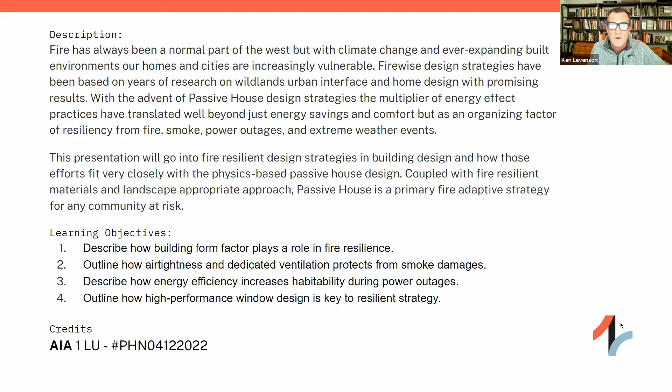Wildfire resilience and the growth of wildfires are of ever increasing importance. We've seen devastation in the West, including the Marshall Fire in Colorado over the holiday season this year, just absolutely devastating. So how can Passive House help support greater resilience in the face of wildfire? We're really glad to have one of our own, Andrew Michler, as quite an authority with growing experience, for better and worse, around wildfires.

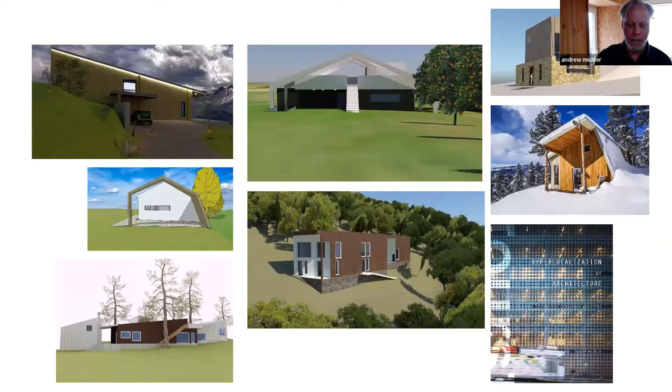Almost all the projects I work on are in WUI areas, that's the wildland urban interface. What that means is basically places that are in forest or at the edge of forest, either communities or a single family home within a heavily wild area. But as we discovered in this last fire, it could also be entire communities just in grasslands that could be threatened too. So all my projects have to think about fire quite specifically.

Actually, I do have one in New York. I don't know if you guys have wildfires in upstate New York, so maybe I can use a little more wood than I typically can, but most of the time I can't.

A lot of the conversation around why we're talking about passive house here for rebuilding after the Marshall fire is because Xcel Energy is providing a $37,500 rebate if you build to a certified passive house, which is pretty unprecedented. And that has a lot of people talking.

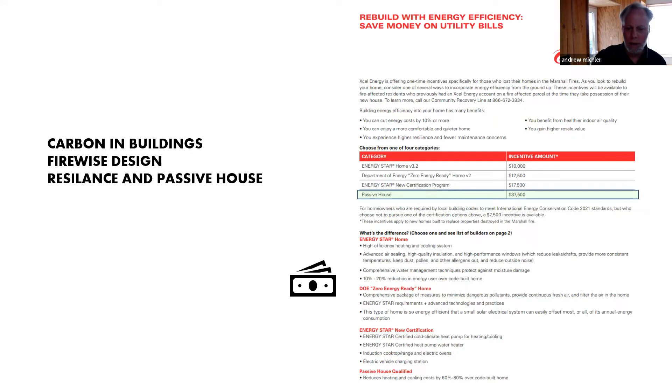It's really got the attention of local government communities, as well as lots of individuals. So we've been working a lot with the Colorado Green Building Guild on providing resources and doing talks on what passive house is, because a lot of people are going to ask their local builder or architect who has no experience, 'can you do passive house?' And they'll probably say yeah, sure. Then we have to figure out how to get that from acknowledgement into actual practice. So we're doing a lot of work on the back end to make this as smooth a process as possible, so this community will become a carbon-ready community in the future.

In terms of fire, I'll read this article that just came out a couple months ago. Researchers discovered that a 2008 newer home is about 16 percentage points, or 40%, less likely to be destroyed than a 1990 home experiencing identical wildfire exposure. Strong evidence concludes that these effects are due to state and local building code changes—first after the deadly 1991 Oakland firestorm, then the strengthening of wildfire codes in 2008.

They observed that vintage effects are highly nonlinear, appearing immediately for homes built after building code changes. There's no similar effect in areas of California not subject to these code changes, or in other states that lack wildfire codes.

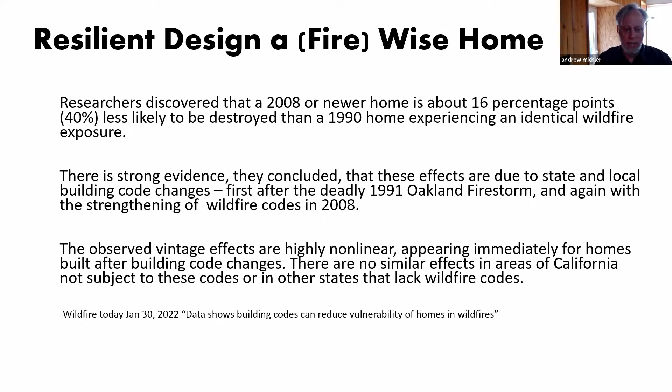So this is one of those things where we see a direct and very powerful correlation between what we build and vulnerability to fires. That level of insight is really quite powerful, not just for individual buildings but for community design and code. Right now code is relatively weak—your standard code might require 5/8 drywall between the garage, you have to insulate the buildings anyhow, and typically put in smoke alarms, and maybe fire blocking within the wall system.

Probably the most aggressive thing we see now for most code-built houses for wildfires is using a Class A type of roofing material. That's typically one of the more vulnerable parts of the house, but fire gets into a building in a multitude of different fashions. So when looking at wildfire conditions, just a fire-resilient roof is certainly not going to be enough.

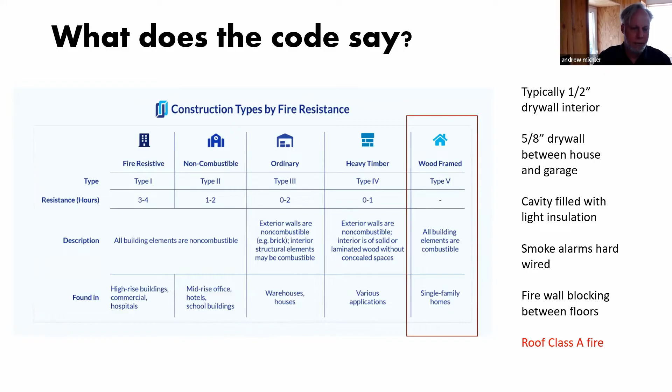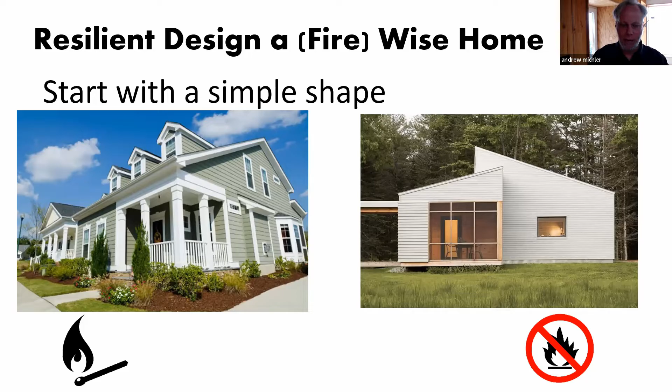So how does that work within the context of passive house and the physics of buildings in general? Well, it starts with the simple shape of the building. We know famously, in passive house, we talk a lot about form factor—turns out that form factor, or a simplified wall-to-floor ratio, meaning we reduce all these bumps and edges to the building, reduces the fire impact of the building when fire conditions come by.

Here's a good graph of what happens. Often in a wildfire event, the first thing that happens is embers coming into the building space, and your building is most vulnerable to these embers when they lodge into corners, underneath cantilevers, or onto corners with decks or eaves. The more complex the building is, the more places for small fire conditions to evolve into larger fire conditions that can get into the structure of the home quite quickly.

Even underneath solar panels, for instance—sure, we have a Class A fire roof, but if we have debris underneath a solar electric array and embers get into that, it can burn right through the roof system, into the roof substrate and into the building itself. So form factor is kind of that first defense against wildfire vulnerability, and also, of course, saves quite a bit of energy.

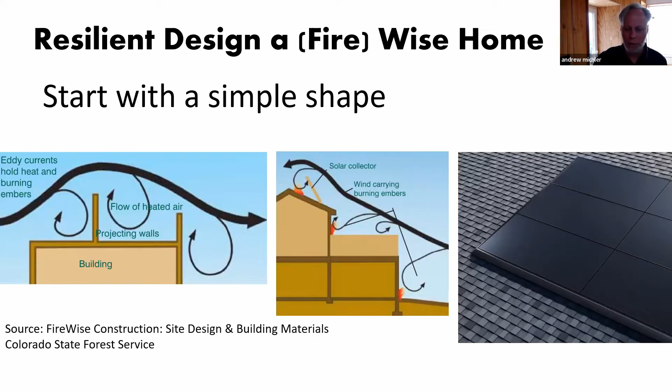I have a slide a little bit on how form factor works in passive house later on. The second serious condition to look at for wildfire resilience is around the house—what they call defensible space in the WUI world, but it applies in a more urban setting too.

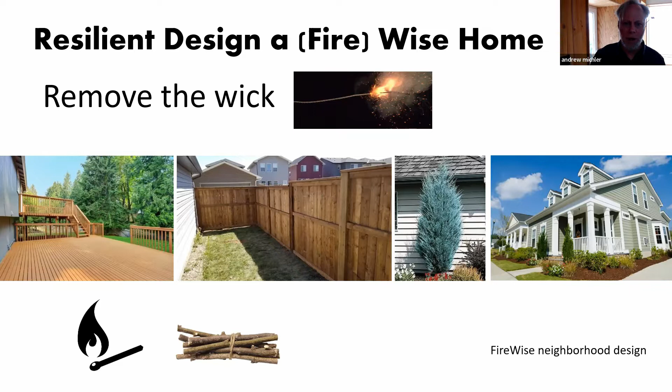We're also looking at plantings, fences, wooden decks, all sorts of conditions right next to the building that essentially act like a wick. If the deck catches fire, that's like setting a bunch of twigs on fire right next to your building, like a small campfire. If a fence burns, it can burn right up to the building. So eliminating that condition right against the building is key. Plantings like junipers or other highly flammable evergreens, decks, railings, all these small conditions right against the building make it much more vulnerable.

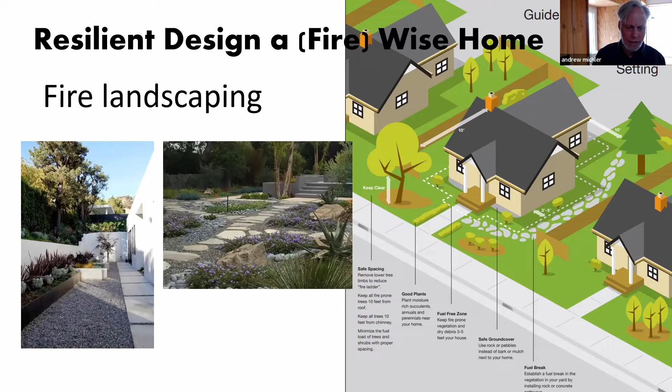Further out, we look at Firewise Landscaping conditions. The first 5 feet or so typically want to be more hardscaped than not. Here are some nice pictures of how people deal with that—minimal plantings around the immediate area of the building, using plantings not prone to support fire, and clearing up pine needles and leaves before summer or spring. I live in a forest, so keeping ladder fuels from going into tree canopies and spreading that way is especially important to me. Landscape is a critical component of that defensible space.

That defensible space also extends to neighbors—making neighborhoods a defensible space, what we call Firewise Neighborhoods. This isn't necessarily codified, but neighbors often get together to create a shared defensible space throughout the built environment between them and the wildlands they border. Even though it's more complex to organize on an individual basis, it's extremely effective when implemented in vulnerable communities.

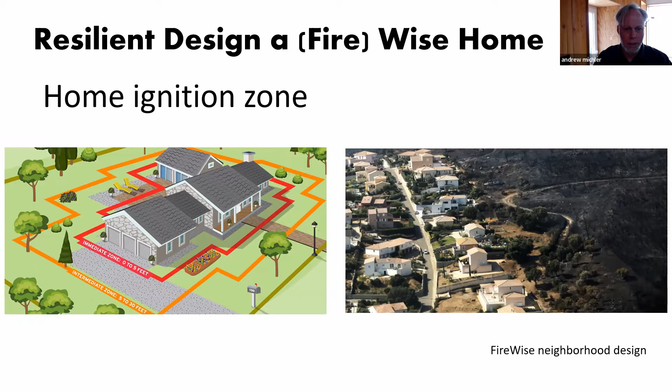When we get back to the buildings themselves, there's something interesting about how I've been working with Passive House assemblies—the assemblies we're seeing quite often now with Passive House turn out to be extremely fire resilient, happily.

There are products out there that help reduce this vulnerability while still creating a ventilated roof, but I actually prefer to get rid of the entire problem in the first place. With Passive House, we can use unventilated roofs that are properly detailed for good moisture and condensation management within the roofing system, which also eliminates the possibility of overly heated, saturated hot air and embers getting within the roof cavity itself.

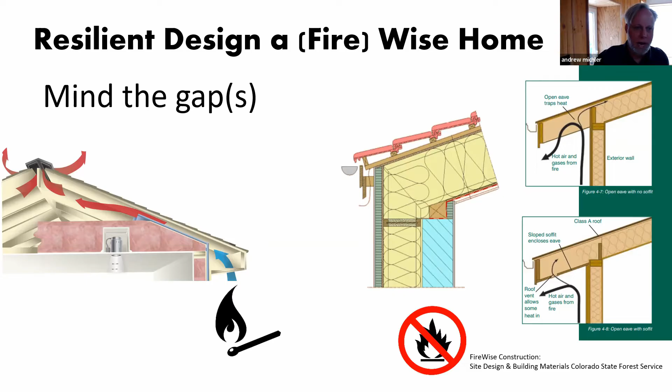So minding those gaps—the second amazing place where Passive House aligns brilliantly with Firewise construction is the windows. Windows are extremely vulnerable to fire; they crack from the heat. The second thing that comes along in a fire event is a heat front—first you have embers, then this massive heat front. Imagine a house burning next to a structure, or a large grass fire, or trees on fire right in front of the building—that heat can actually crack windows.

These kind of cheaper window frames can fail. We've seen out here where I live concrete houses burn, simply because the glass in the buildings failed relatively quickly. Now when we look at Passive House, we're typically using triple pane windows, with much more substantial frames, and adding tempered glass gives much better protection than what traditional code compliant housing requires. I don't know of any fire resilient codes now that look at glass beyond just providing tempered glass.

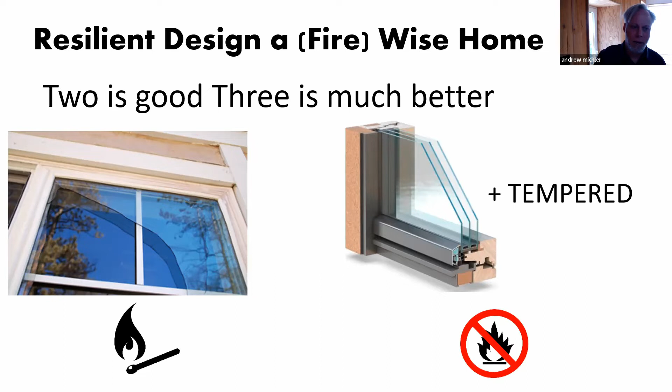They say in a fire front condition, you add about 5 to 7 minutes per pane of glass, so you can double your protection from a triple pane system compared to a simplified double system, for vulnerability from the heat front. And then, of course, what most people are familiar with for fire resilient design is the materials on the building—roofs are pretty obvious.

Typical 3-tab asphalt roofs are considered fire class A. But metal roofs are becoming much more popular. They're a little more chic in some conditions, depending on your architectural preference.

There are metal roof options that look like slate, and cementitious options that look like slate or wood cedar shake. Probably the most popular we're seeing is Hardie board or fiber cement boards that can look like shake or simple straight lap. Now they're coming in sheets with more contemporary design, so they're more architecturally interesting.

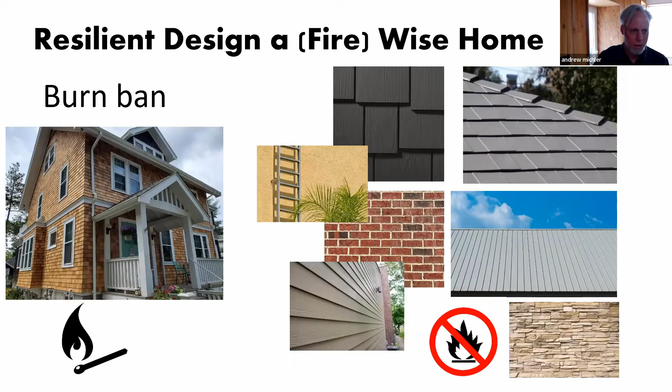So it's more than skin deep. Foams, even though they quote unquote put fire resilient materials in them, typically burn extremely well. I think it was Lloyd Alter who used the term solid gasoline. When it gets going, it's nearly impossible to stop.

So avoiding foams for fire resilience is a first option. Fiberglass actually isn't typically great for fire resilience either, because it lacks density. There's a lot of air movement potentially within fiberglass batts, which means that if a fire does start within the wall cavity, it has oxygen available to it, no problem.

So typically the first product people talk about is mineral wool boards or batts, stone wool as well. Those are pretty much fireproof, technically speaking, at least within the conditions of a fire event or house fire. Cellulose is surprisingly very effective within fire conditions too.

They use borate, about 15% mixed in, so it will smoke but won't carry flame at all. Because it's dense packed cellulose, it chokes all the oxygen out from the wall cavity. So there's no opportunity for fires to get much oxygen when they're within the wall itself. That's kind of a secondary defense strategy.

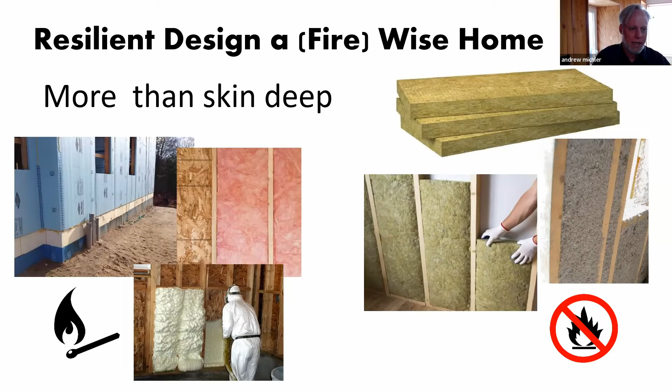I'll go into a little detail about what I was thinking when designing my place. It was around 2014 when I first started designing this passive house. You can see it's in a heavily wooded area. Right across the way, we had a fire in 2001 or so, about 10,000 acres, that I stared at for days and days, watching that thing burn.

That's when I really knew fire was the primary condition to try to design around and with. If we can build buildings in harmony within WUI areas, then I thought that made a lot of sense as a proof of concept.

So I went pretty crazy. I decided to build a typical framed wall, a typical passive house Larson truss assembly system. You build a structural wall on the inside, and then I skinned it. That's my air barrier, in this case the plywood, which is also the shear wall. Then I put in Larson trusses, which are basically like I-joists, homemade ladders, and they're just cavities to put lots of insulation in.

Colorado, of course, needs lots of insulation, at least in smaller houses. On the outside of that is where I really started thinking about fire resilient design and used a mineral wool board, about 2.5 inches of that. Then the cladding, mostly fiber cement on the outside, or steel, and then some wood accents in protected areas.

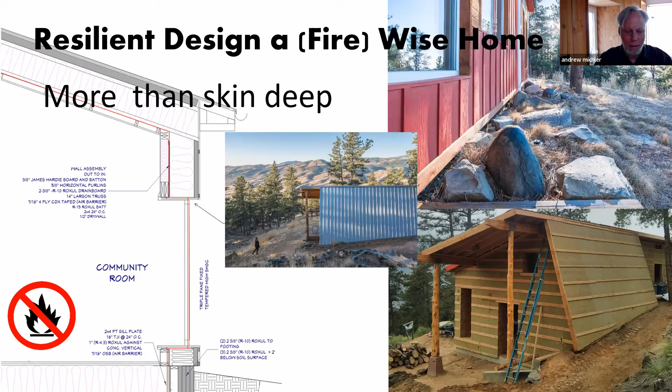Even codes here are still fairly minimal for fire resilience, to my chagrin, after a decade of substantial housing losses in the community. We're seeing fire codes change to the point where they're talking about a fire class A wainscot around the building at 3 feet. This is about the most I've seen fire codes change, maybe a bit more, but it hasn't been substantial enough yet.

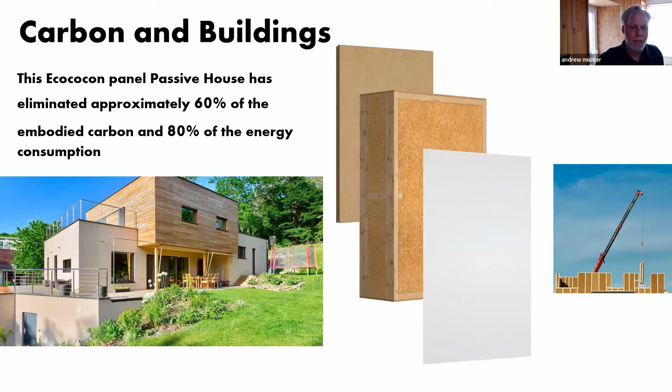Looking at the carbon process of buildings, we're not just considering passive house, but the whole carbon question. A good friend of mine, Bjorn Kierulf, developed these Ecococon straw panels. They're mostly in Europe, but projects are popping up in the United States too. I bring this up in the fire conversation because not only are they positive carbon sequestering building materials, but they're very fire resilient.

And that's the first thing every smug Twitter comment says whenever Ecococon is shared on Twitter: oh my God, fire will burn these buildings down.

We found even in straw bale housing, there's the Sunshine Canyon fire in Boulder from a number of years ago. Almost all the houses in the valley burned, but one house survived, and it was a straw bale house. The reason is similar to the cellulose situation: straw rarely burns in itself. It's mostly silicate, so as just a strand it tends to burn, but bunched up, it doesn't hold fire well.

When you pack it really densely, as in the Ecococon panels, it doesn't support oxygen, which makes it harder to burn. And when you add a fire resilient material like half-inch gypsum, or clay finishes on the interior for natural quality, you're talking about a 120 to 145 minute rating under extreme fire conditions. So fire resilience is really about the assemblies, not just individual materials. We can build with all sorts of materials not typically considered fire resilient, but in the right combination, they turn out to be extremely fire resilient.

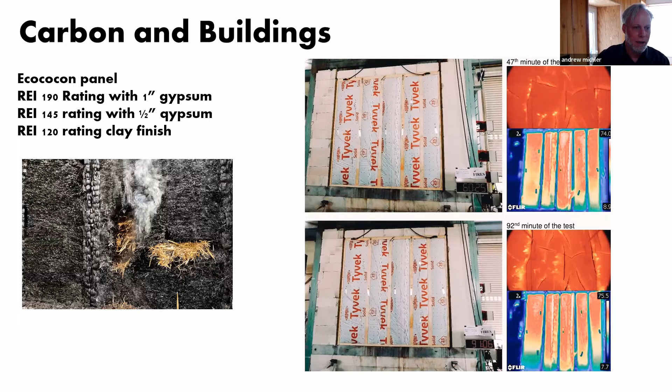Smoke is something that, even if a fire condition isn't happening immediately at the property, affects tens of thousands of people around fire events, especially more urbanized ones. BC's seen this, you guys in California have seen this for the past couple of years, and we've seen it in Colorado.

That smoke within the building itself diminishes what we call IAQ, indoor air quality, significantly. So the first line of defense, of course, is the airtightness of the building. That goes without saying, and it's typically not well understood within code building practices. In a passive house, of course, it's something we obsess over.

We know that ventilation, having balanced ventilation with a very high airtightness fabric, work hand in hand with each other. That means we have controllability of the air system within the building, meaning we can filter the air coming in. This is not just for fire particulates, which can be significant and I'll show a slide on that, but also long-term for general IAQ issues in urban environments.

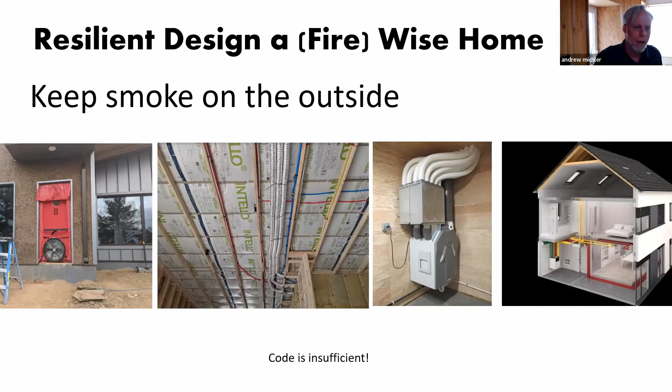In fact, it's gotten to the point where in Australia, which has seen two decades of significant bushfires in Queensland and other areas, they're looking at passive house airtightness as a primary source of protecting your home when it comes to fire resilience. It's really great to see how the methodologies of passive house are stretching into these other scenarios of survivability and quality of life for people around fire events.

In Canberra, which is right in between Sydney and Melbourne, the capital of Australia, a very forested area, somebody built the first two certified passive houses there. They're very similar houses.

He did some testing a couple of years ago around IAQ in fire events, and he monitored them quite carefully. We'll see that in the first chart—blue is the outside air quality in micrograms per cubic meter.

The 24-hour threshold is the recommended health threshold for fires, that dotted line at the bottom. So we're way, way over that normalized, considered-healthy threshold for micrograms per cubic meter in the air.

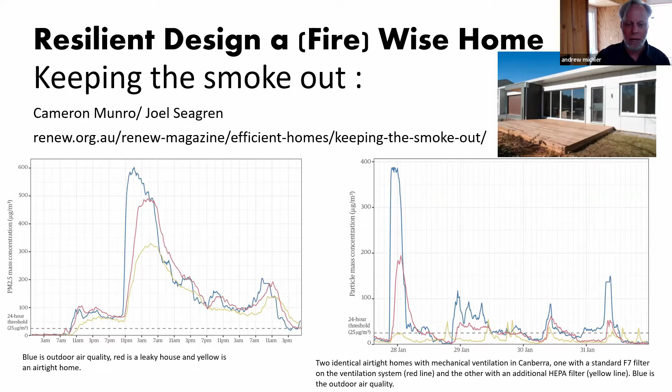So controllability is key to smoke conditions. Mark Attard, a passive house builder, had his house right next to the edge of where the Marshall Fire burn was. He did a significant passive house retrofit, put in balanced air ERV and a filtration system. His house had a little bit of smoke, but pretty nominal, while every neighbor had significant smoke damage. He was basically the only person who could move back into his neighborhood, even though the other neighboring houses were intact on his side of the street. The smoke damage was so severe that they either have to mitigate it or tear out most of the interior and replace it, while he survived it.

Let's get into form factor for passive house. We'll go through this pretty quick, but I want to show how it really impacts the overall way that we build houses. So form factor, think of it as the exposure of your surface area to the exterior conditions.

We know that quite personally—when it's wintertime, we're wearing a pair of mittens, our fingertips are exposed. Of course that's a non-insulated or code-insulated house. But if we insulate it and still have a lot of surface area, our fingers can get cool pretty quickly. So that's why we like to bundle things together and reduce the overall surface area.

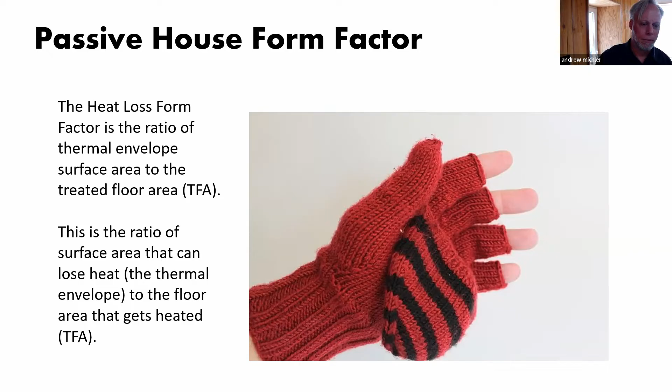When it comes to passive house, we can mitigate that. For a very basic, simple house we can build that, but it's not necessarily architecturally interesting. As we know in the PHPP, the Passive House Planning Package, we can often make a slightly more complex shape—we just add more insulation.

But once we start creating those very small bump-outs from the building, it dramatically reduces the energy savings. So finding something between the first rectangle and the second offset rectangle is well preferable to the third option, where we create a much more complex building that's much less fire resilient, and also requires much more insulation and cost as a result. So the more simple, the more cost effective, the higher the performance, the more fire resilient.

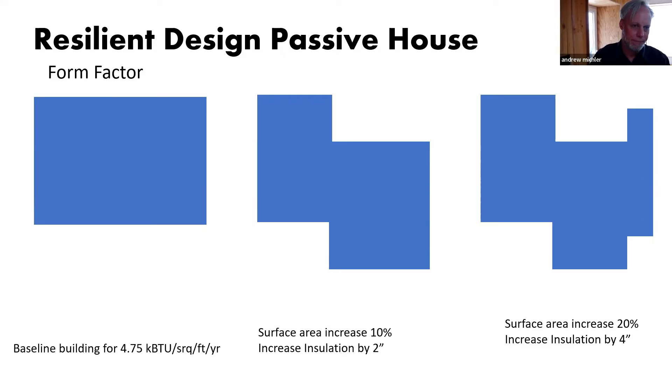Let's look at the ventilation system. This is a project we have underway in Colorado Springs, jumping between what is a passive house and what is fire resilience. I'll get into more detail.

The ventilation system is great because dedicated ventilation systems protect inhabitants from exterior and interior pollutants, getting rid of kitchen exhaust fumes, fumes from bathrooms or storage areas, as well as dedicated kitchen ventilation. During a fire event, occupants can just shut the system down. They have controllability at that point where if it gets really smoky for a couple of days, which is quite common, you can shut your ventilation down so you don't have to worry about outside particulates.

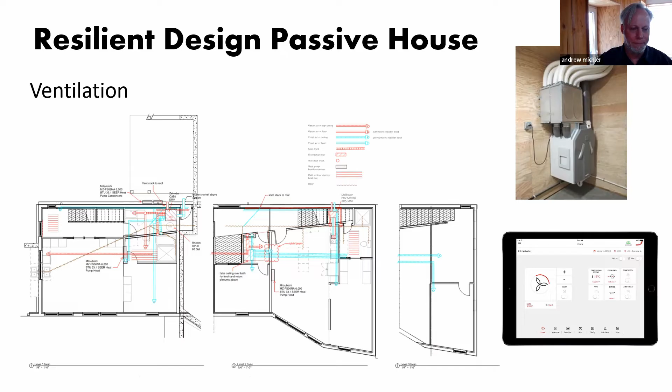We can survive a couple of days in an airtight home pretty well with a little bit of elevated carbon dioxide. Just don't fry your chicken dinners at that point. But it gives you the ability to protect the home through the controls of the building.

Jumping back to the fire materials on the exterior side, here's a project I completed on a neighboring passive house next to mine, where we used fire resilient materials and simplified the architecture, using ways of protecting the house from both front burning on the uphill side and back burning.

On the back side of the house, in the lower section, it's just concrete and steel, because fires that back burn are actually much more lethal than fires that front burn, or rather they're different conditions. Front burning is like a wave of heat and embers, but it typically burns quickly and snuffs out. Back burning conditions can burn much deeper into the ground and right up to the building envelope, so you almost want to think about two different fire conditions.

In this case, we can get away with cork. It's a fire resilient material, considered a fire B rated material, and with a fire resilient substrate it's actually quite fire resilient. It doesn't hold flame very well, so it can take a big fire front.

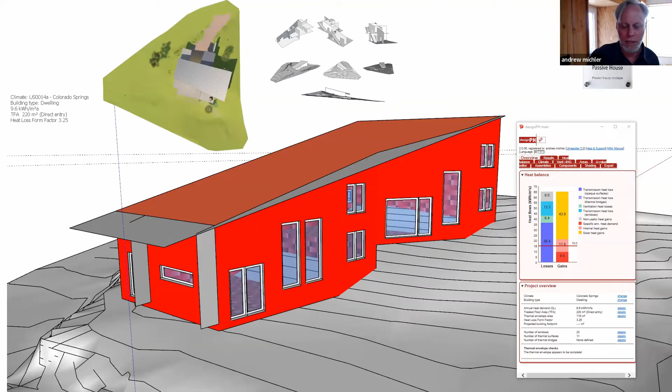I showed the ventilation system earlier. Colorado Springs has lost neighborhoods before, so they don't let us use any wood outside. So we're simulating a wood exterior using Hardie board siding materials, and even though the renders look like wood, they'll be cement fiber. Again, our roofs are unventilated and in steel.

We have to do a landscaping plan that is quite aggressively fire resilient, using massing of materials away from the building as far as wooded materials or plantings, then fire resilient landscaping, with patios and lower floors cement-ish, and synthetic decking on top. The other houses built around the building are built to similar conditions, creating fire resilient neighborhoods.

So typically what happened in Colorado Springs was they were losing entire neighborhoods. It wasn't the wildfires, wasn't just grasslands or trees burning—it was one house setting the next house on fire, setting the next house on fire. So we're looking at fire conditions that are deeply reduced by the design of the individual houses in union with each other.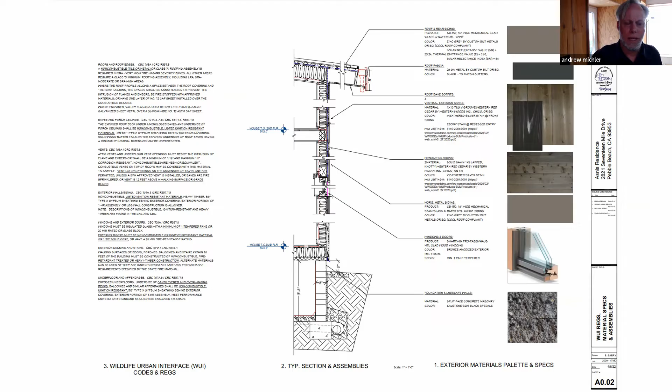Again, we're looking at vulnerability reduced by triple pane windows. Even in a climate where we don't necessarily need triple panes, they're quite effective. And again, the roof system eliminates ventilation in the actual building roof cavity itself.

Certainly Passive House goes well beyond just fire resilience when it comes to overall survivability of a building, during fire events or other extreme weather conditions. In California we're seeing this happen all the time because of fire—they're shutting down power systems as a result. We're seeing this in Texas too, from those super cold days where the grid gets overwhelmed by weather conditions. So the survivability of Passive House is quite extraordinary.

Last winter, something called the Passive House Challenge was proposed by Mark—I'm going to forget his last name right now, sorry—but basically he asked a lot of people in the Passive House community to shut their heat down for a week in the middle of winter to see how it responded. It turns out that in my Passive House, the water lines froze coming into the house. I hadn't really thought about this, but my hydronic heat system failed as a result because I didn't have any water to circulate through the house to heat it.

We had some guests at the time who were recording an album—check them out at daisydaysmusic.com. In the middle of their stay, the heat went out in the Passive House, and outside it got down to like -19 at night, which made me pretty worried about their well-being. We didn't have heat for a good week or so, and they did pretty well without a heating system. It got down to the upper 50s inside, I think, but they soldiered on—they actually seemed to quite enjoy it.

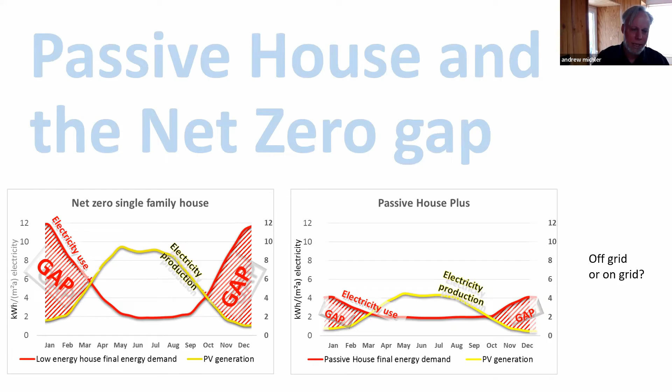Then there's the net zero idea—we want to build carbon-free buildings. So we need to look at this notion of just electrifying buildings. Turns out, in winter we need a lot more energy than we can produce in the foreseeable future with renewables. Passive House reduces that gap between renewable energy production and the energy we need in wintertime. Throw in some batteries and slowly improve the energy storage and production capacity in winter, and that gap is reduced significantly to where we can talk about true net zero buildings.

This is just a quick chart of how the Passive House Institute has been helping us design houses of the future, based on conditions that are genuinely net zero at a macro, or grid-scale, level. So we're building for all these conditions, all within one system.